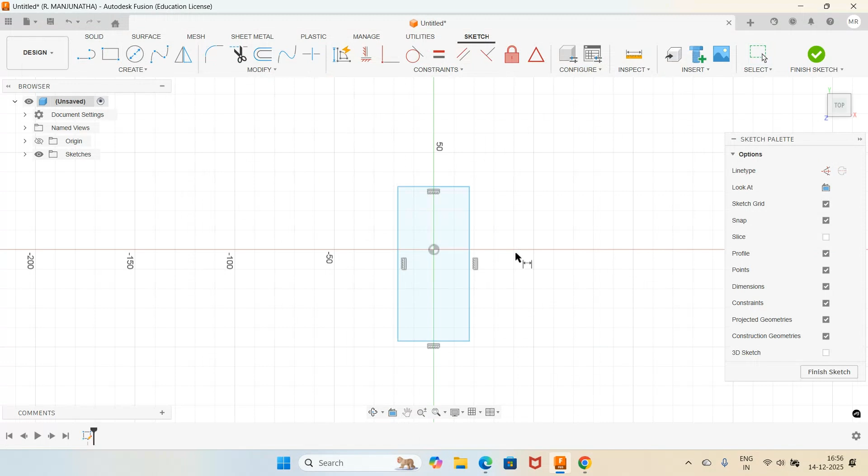To do that, I will go for dimension, select this, and make it 50. Then take this endpoint to this, make this as 25. And from here, you have 60 and 70. Then go to the end of this, make this as 60. And then give this as 130.

Once you do that, the entire model has been constrained, the entire sketch has turned into black. Then go to finish sketch, then go to 3-dimension. Here you can see the extrusion height is 18 mm.

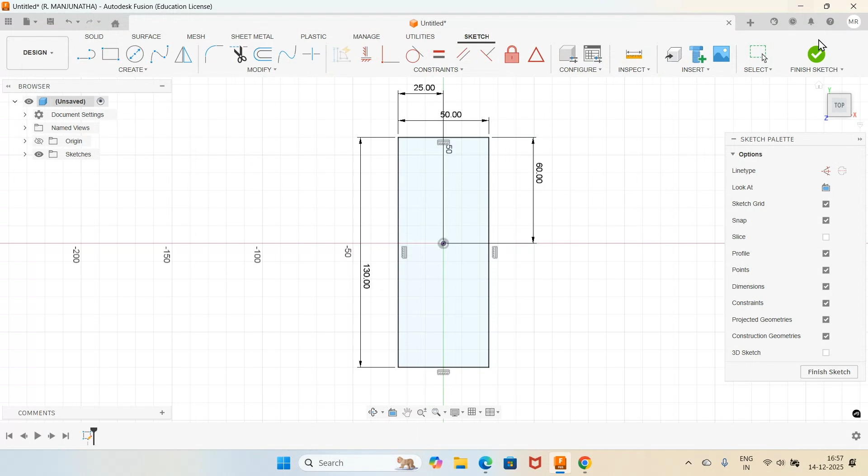So to do that, I will go for extrude, give the distance, now it is showing in the direction. If you go along the direction, it becomes positive. If you want it in the negative direction, you can give the opposite direction and a negative value. So if I take this to the bottom side, you can see it is negative. But since I want it in the positive direction, I will drag this and give the distance as 18 mm. Now once you do that, we have the first model.

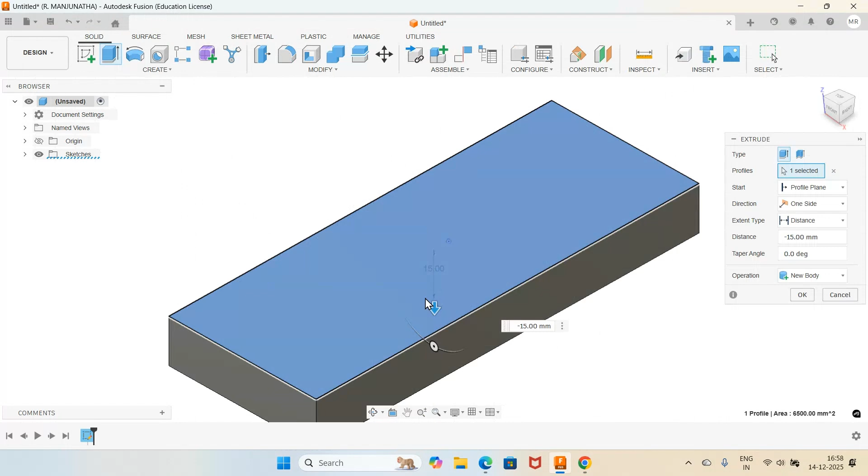That is the base of the model. Then we're going to create this. So what is the dimension? Here you can see I will take the top plane as the reference plane.

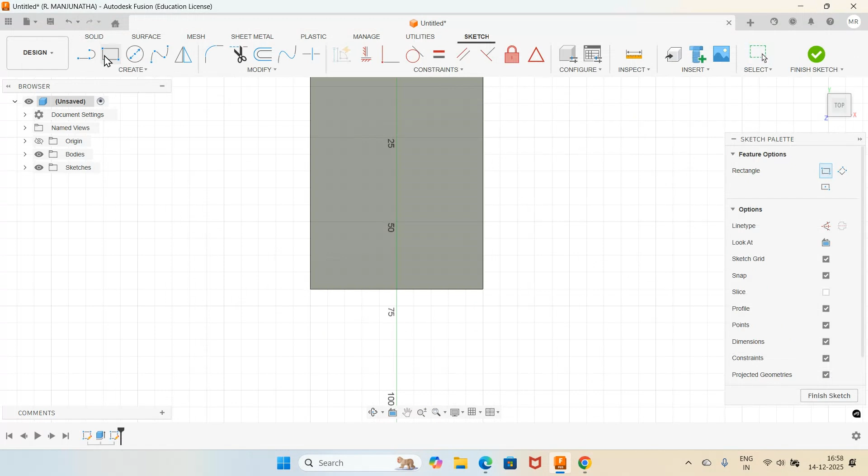Then I will go to sketch, click on this, then come down to this portion. Go to rectangle, select this point and drag this. Then go to dimension. The width is 18, so take this dimension as 18. Then automatically the other dimension has been fixed.

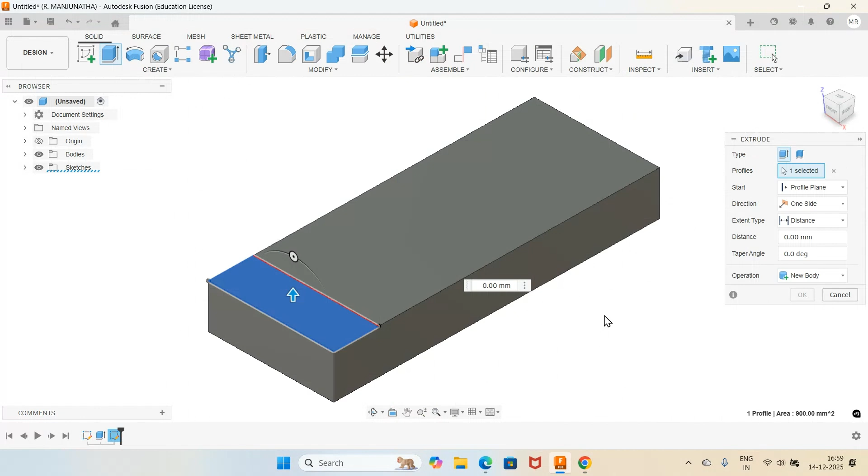The total distance is 40 plus 25, which is 65. Since we have already taken up to 18, 65 minus 18 is the distance. So I will go for finish sketch, go to extrude, select this profile and go to 3-dimension. Now here you give 65 minus 18, and since it is joined, you say OK.

Then automatically that becomes the integral part of the first body, the first one. Now you can see here you have only body 1. The next thing is I need to create this as a

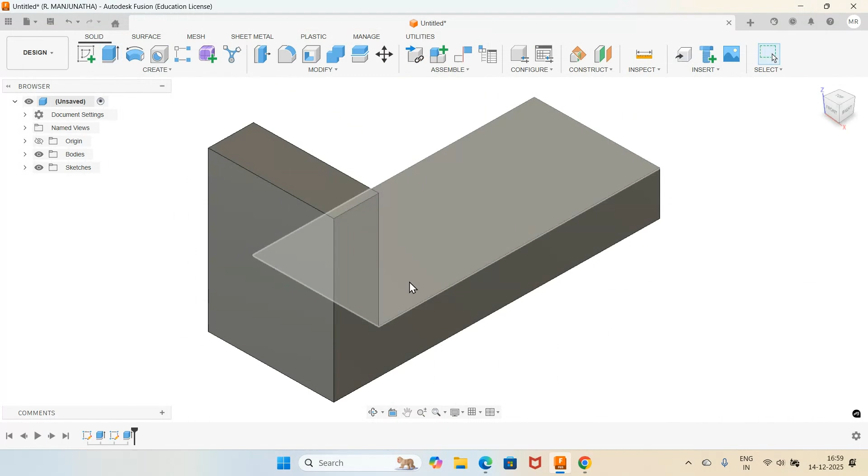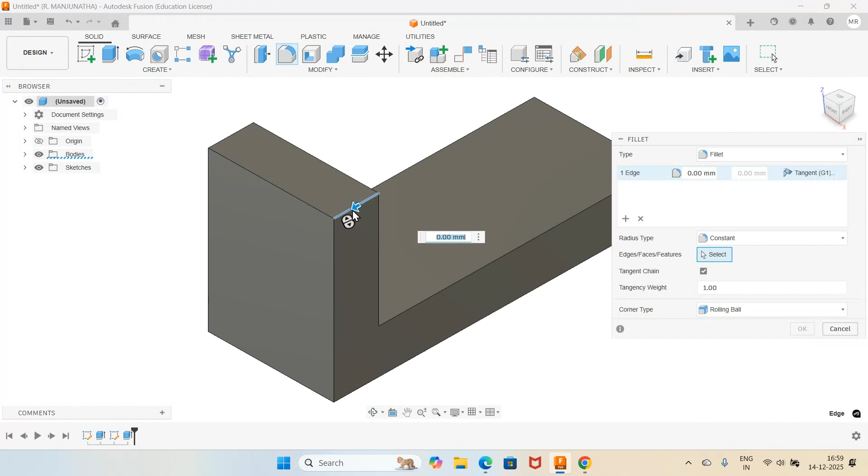radius, that is the fillet radius, which is of radius 25 mm. So to do that, I will go for round, click on this, the fillet dialog box will appear, select this edge and also this edge, and give the dimension as radius 25. So it will be created here.

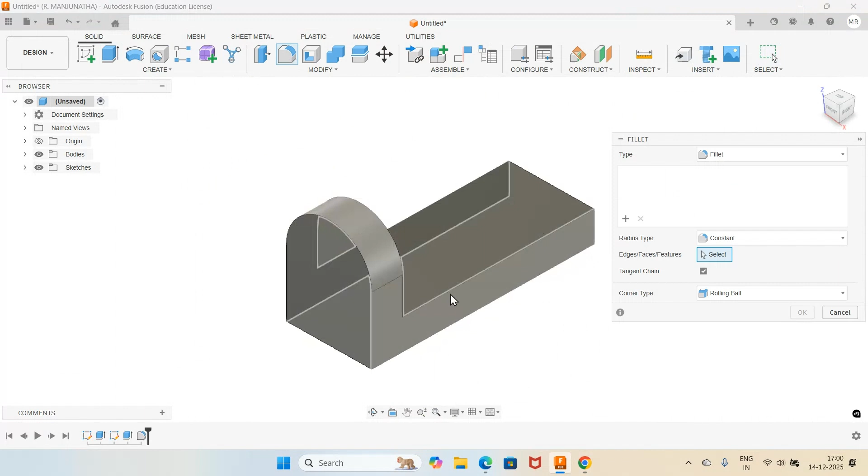Similarly, on the other side, you have the radius of 25 in this case also. So to do that, I will go to fillet, select this edge, and then on this side also select this edge and give the radius as 25.

So now we have the entire thing we have done. After that, what I need to do is create this one, which is 20 mm from this side and also 20 mm from the other side, because totally, sorry, 10 mm on this side and 10 mm on this side. Total distance is 70 mm.

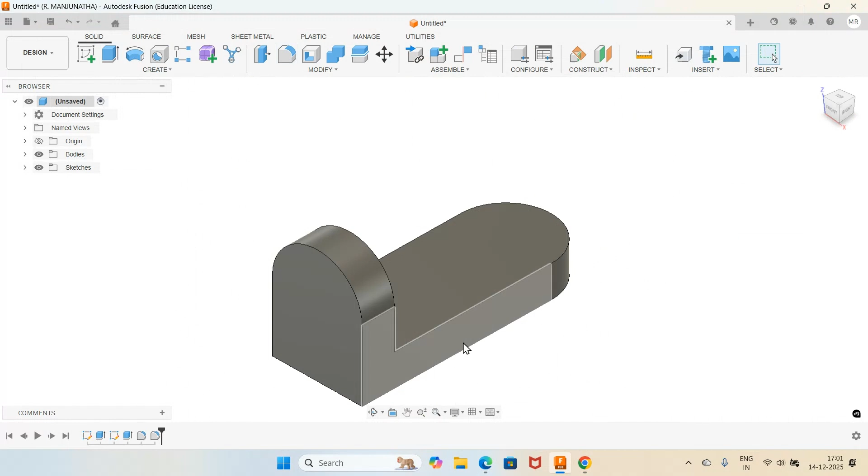So to do that, I have to go for the front plane, that is from here, so I need this plane. But the question is, here you have only 50 mm width if you look from the left side, and you need 10 mm away from this. Since you don't have any plane here, 10 mm in front of this particular direction, so now I need to create that.

So I will go for construct, go to offset plane, select this plane and give the distance as 10 mm.

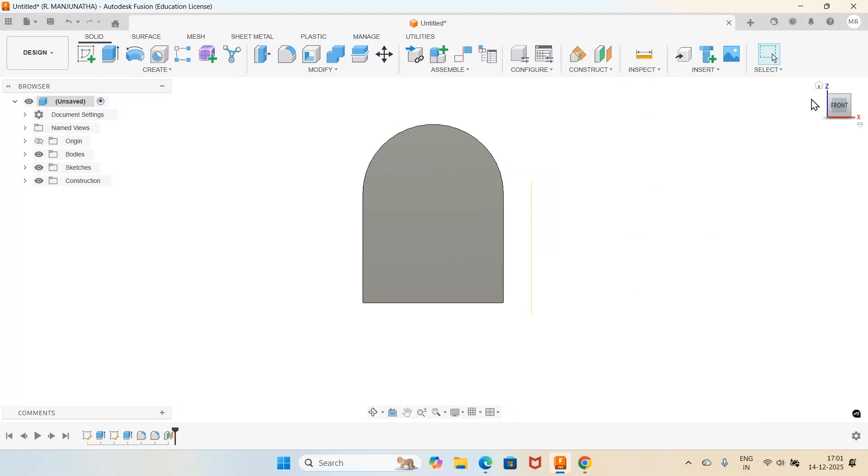So now if we go in the right side direction, you can see that one plane is created, which is at a distance of 10 mm from this base model. Once you do that, I need to go for a circle of diameter 36, and there is one more circle of diameter 22.

To do that, I will go for sketch and click on the newly constructed plane, which is at a distance of about 70. The center of this circle is 70 mm from this base, so I need to consider that.

First I will go for dimension and check between these two. What is the dimension you have now? I will select between this and this. You can see there is a distance of 70 mm.

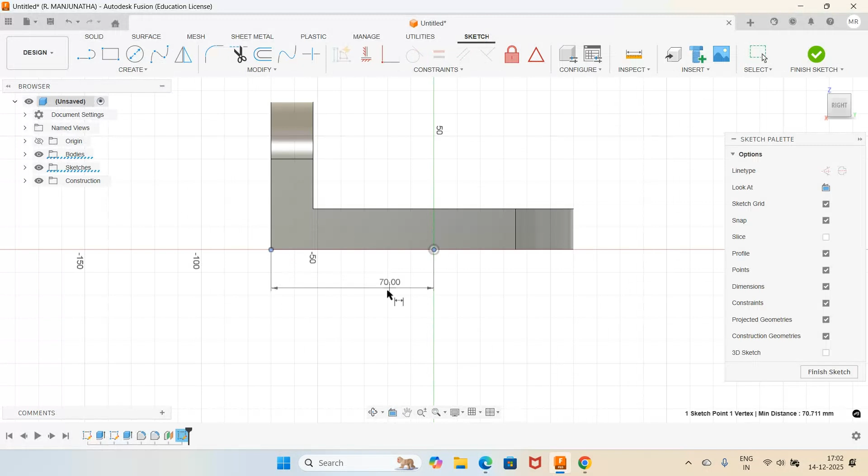Now I will create the circle. Go to circle, select some arbitrary point and draw a circle. And you have one more circle - click and create one more circle.

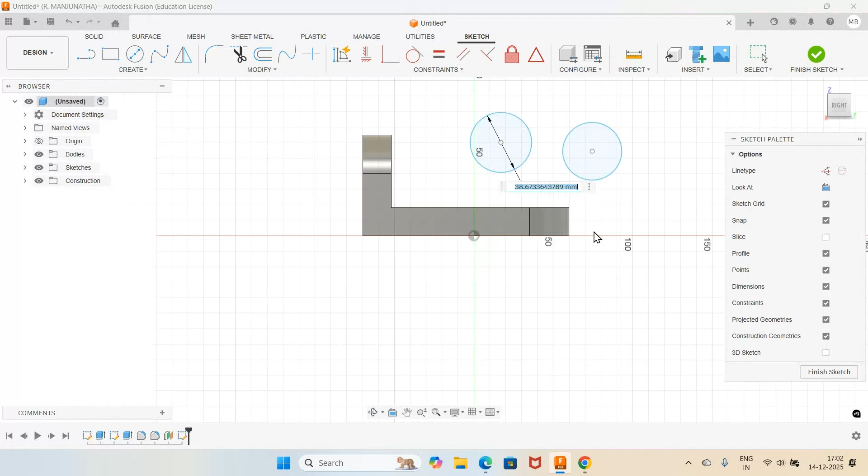What dimension do you want here? The dimension is 36, so I will go for dimension, select this, and make this dimension 36. Once done, the center of this circle should be along the center of this. So I go for vertical, select this and select this, so it becomes vertical in one direction.

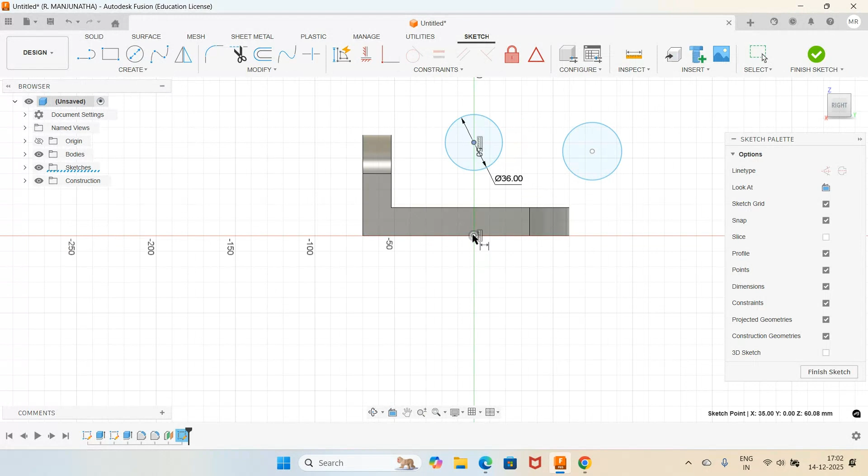The question is, what should be the height of that? The height is about 50 mm from the base, from this point, which is the model point. So I go for dimension, click on this and this, and give the dimension as 50. Now this has turned black.

Similarly, you can see this circle is also blue. Now I want the center of this circle to be the center of this one. Since this is 36, what is the other dimension of the circle? You have 22, so I need to go for dimension, select this, and make it 22.

Now the circle has been given the constraint of dimension 22. What I want now is this circle's center point to be the same as this one, with reference to this. So I go for concentric, select this circle and select this circle - see the color now.

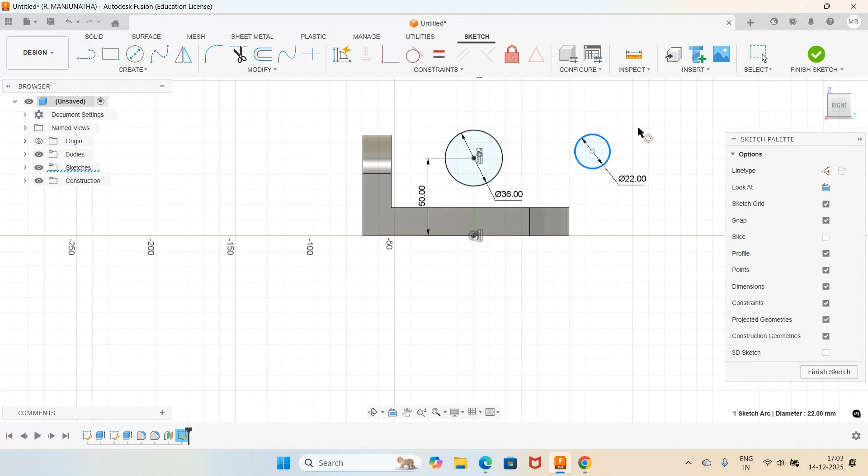Automatically it becomes black. Once you get this, go to finish sketch, then go to 3D and go to extrude, select this profile. Since I want the direction to be opposite, you click over here.

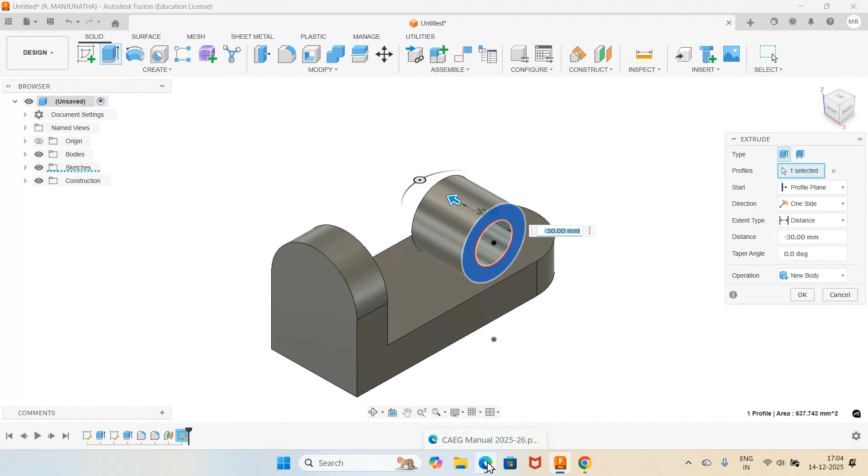Now what is the dimension you want? That depth is 30 mm, so you give minus 30. Now we have the sketch which has been completed.

The next question is, I need to create this portion now. So how to do that? For that, I will go for sketch, take the center plane, which is exactly at the center, then go for fit.

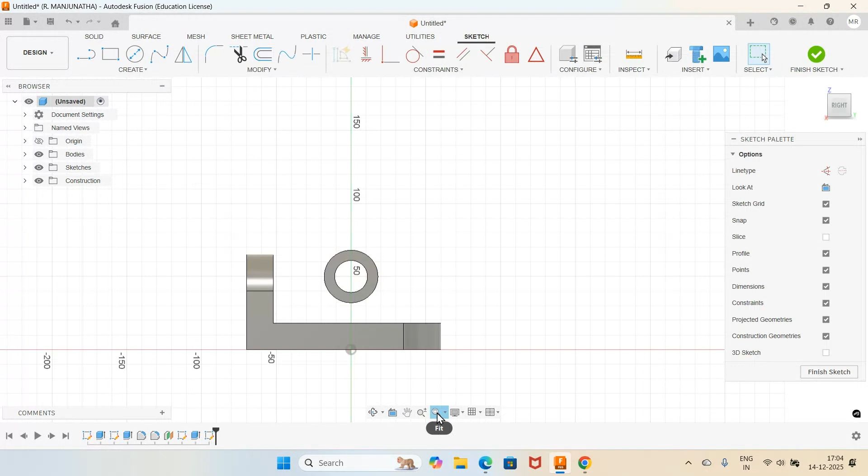Now I will go for create, then project, select this outer circle and say OK. Then I need this line to be joined with this particular portion. Similarly, that line is also to be joined tangentially to this outer circle.

To do that, I go for line, select some arbitrary point and place it. Then go for tangent, select this line tangentially to this. Now we have this pointer.

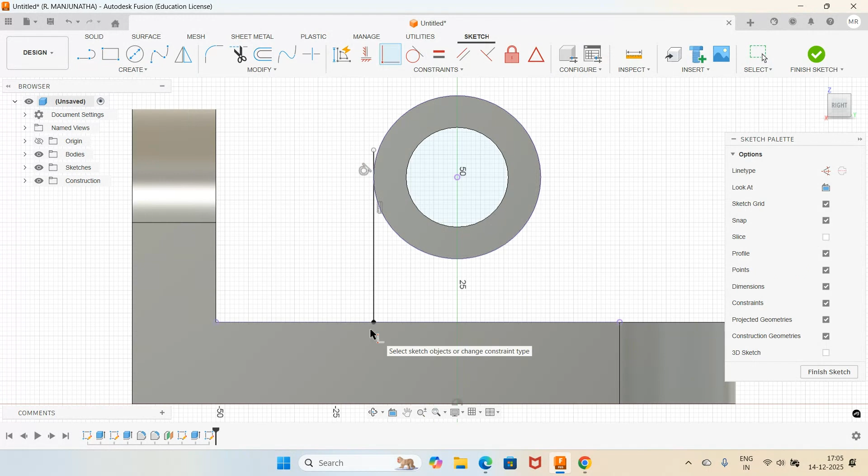Similarly, go to coincident, select this and select this line, so we have the point which is on this side. Similarly, on the other side also, I want the same thing done.

So you go to tangent, select this line tangential to this outer circle, and similarly I want the coincident of this point on this line. Once done, you remove the extra portion by going to trim, select this and remove the extra portion here.

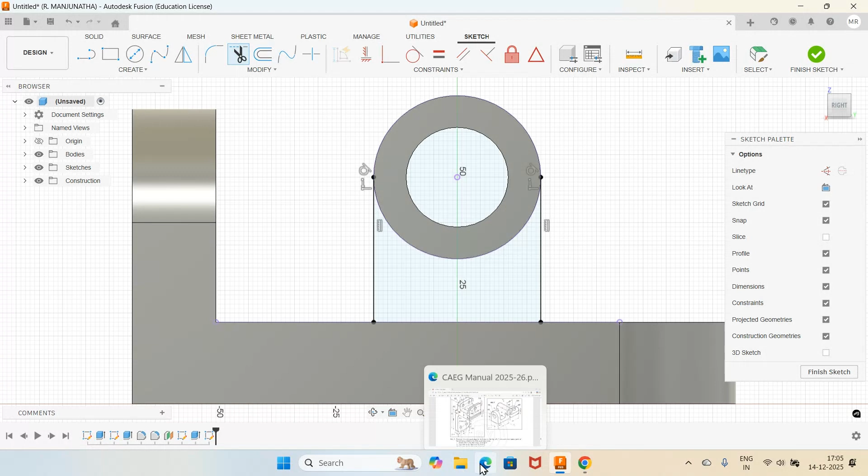So now we have the area. Once you have the area, I want to extrude this to a depth of 50 mm. So I will go for finish sketch and go to 3D. Now this is exactly at the midpoint.

So I want only 50 mm, so that's 25 mm on this side and 25 mm on this side. To do that, I will go for extrude, select this profile, and go to symmetric, select on symmetric.

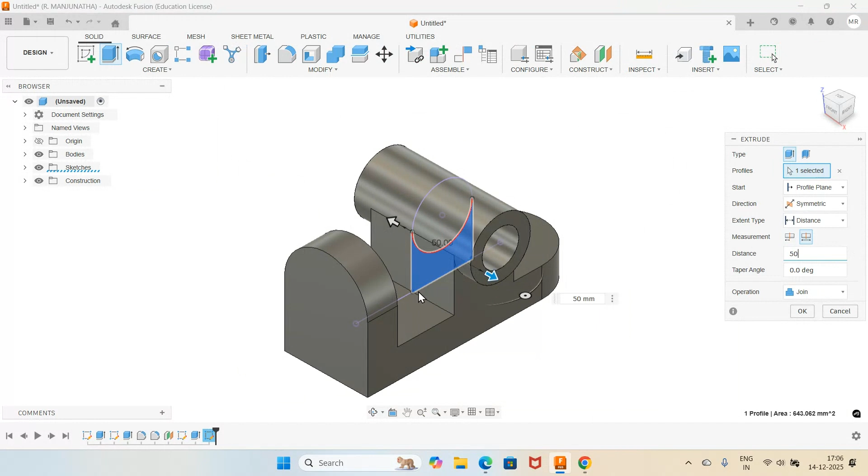So extent type the distance, then you take whole length and give the distance as 50 mm. Then you can see that has become an integrated part. Since I want to join to the same model, I will say operation is joined and say OK. Now the drawing has been completed, but we need to create the holes.

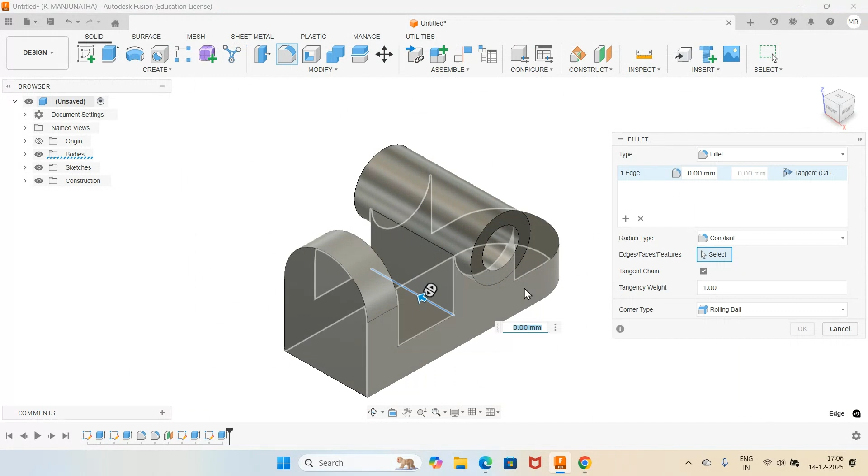Which are all the holes? First you have the fillet radius. This side is fillet radius of 5, here also fillet radius of 5, here also fillet radius of 5. To do that, first I will go for fillet, select this line, and then select on the other side. Select it on this side and also on this side and give the dimension as 5.

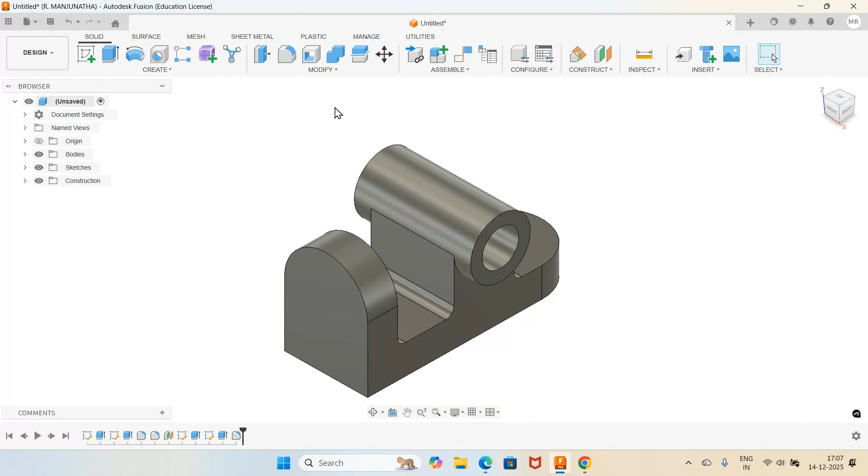So we have considered the fillet radius. The next thing is I need to create a hole there. So how to create the hole? You just go to the hole dimension, click on this surface. What is the diameter of that? The diameter of that hole is 22, which is concentric with this circle. Or you can take it from the base as 40 mm, that we are going to counter check.

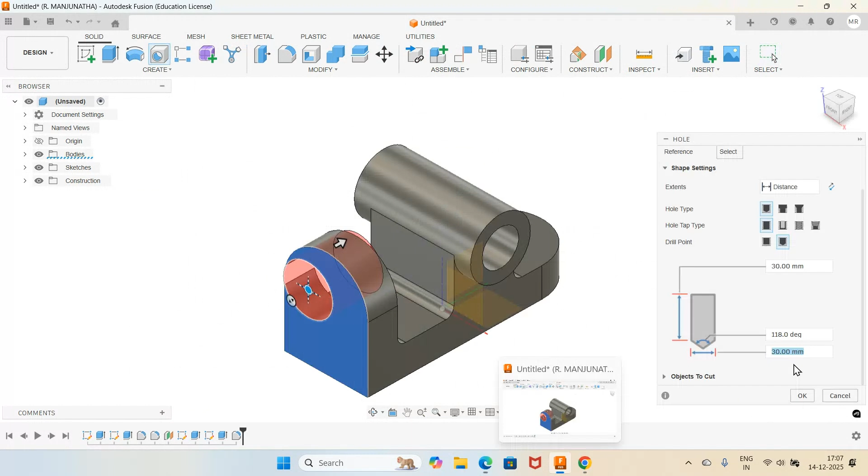So to do that, I will just go to the diameter. What is the diameter which you want? The diameter what I want is 22. You just take the diameter here as 22. Then you say the distance, not through all, up to.

You select this and go to this side, select it on this face. So we have the diameter till a depth of 18 mm. Why? Because that is the thickness what you have, this 18 mm.

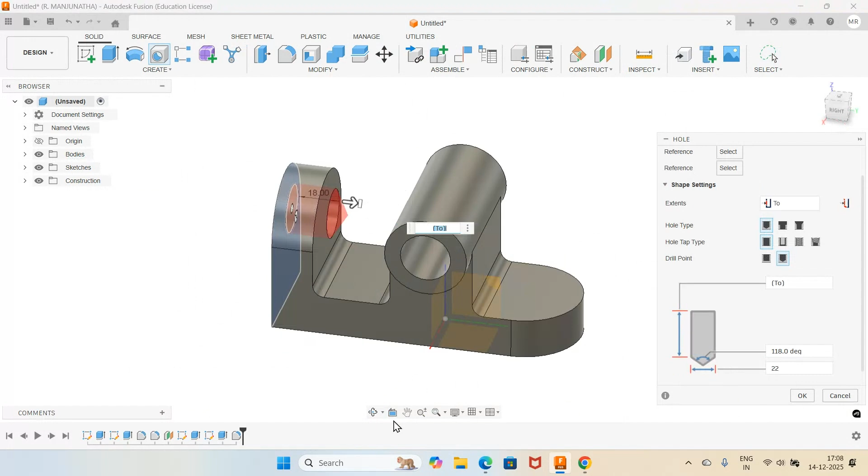Then you just rotate this, then bring it to the center. You just take it onto that point where you have the center point. You just drag it, you can see there are two holes which are coming inside. Bring it to this portion of the hole.

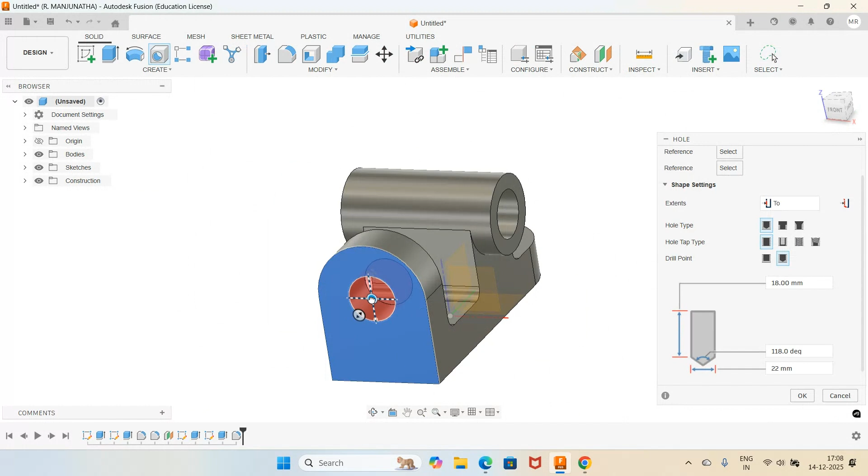You just, by holding the first button of the mouse, drag that and place it onto that center point, then release the first button of the mouse. I will just go to hole, click on this particular face. Automatically that will be considered now because previously I have set that hole as this, and now since the angle is 118 degree, you don't want that, I want flat, so you just click on this flat.

Then the distance, you can say through all, because there is no other face. But here I have taken up to point, because if I say through all, then what happens? It will remove the material from this particular portion also because it is thrown through. Wherever you have till here, it will create the hole. But since you don't have anything after this, you can go for the through all option.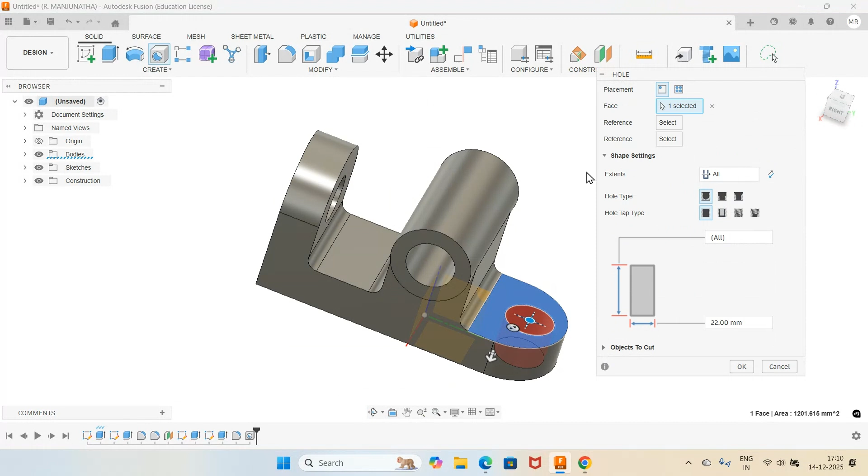Or you can go to up to 2 point, then you can select the bottom face, or you can give the distance as -18, whichever you feel is right. Now then you just drag it out. Now we have the two centers here. I just take it to the first one and place it over there and say click on OK. Now this is how you will be able to create the model.

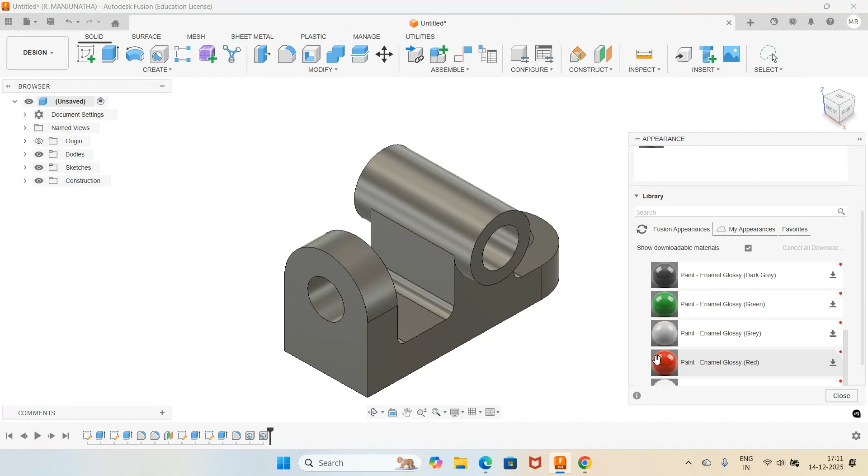Once you create the model, then what I need to do is go for change the coloring appearance. Now you come down to paint, then you come down to glossy, then take red, then drag it and close it. Now this is how you will be creating the model.

Then I want to take it to the drawing. How to do that? First I need to save this, so I will just go for a save and then it goes to the proper location.

It comes to the proper location where exactly you want. You select that particular portion and I will simply say one model, first model, whatever you want, or else you can give this one, ISO underscore 7. So here I will type ISO underscore 7 and the location it will be considered.

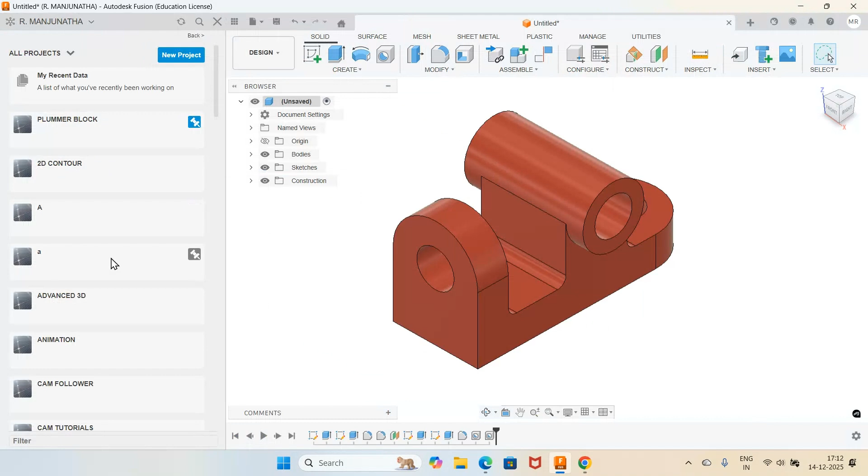If you want to change the location, you can go to the panel, show data panel, and then go to the project, and from there you can create the project here. I want to go for the same one I created in the earlier stages. I will double click on this particular folder. So from the home, we come to this folder.

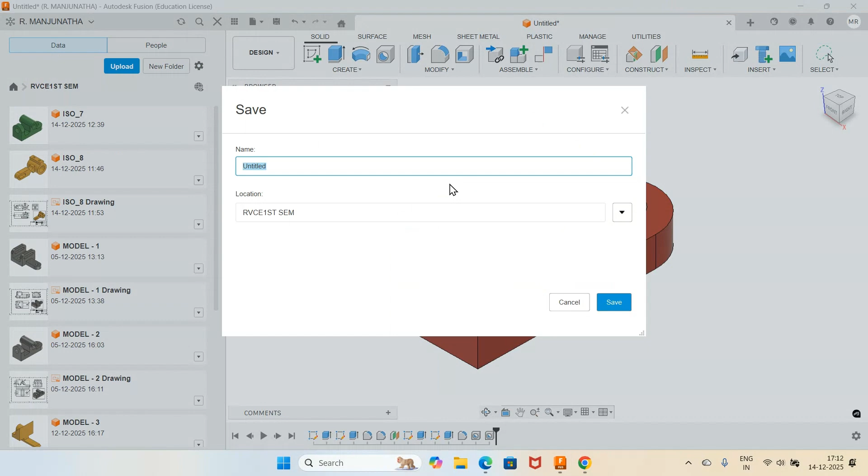Now I want to save this. You just go to save, and I will say ISO underscore 7.

Once you get this, now I need to go for the drawing. So here I will go for the scale. Just click on this, take 1:1.

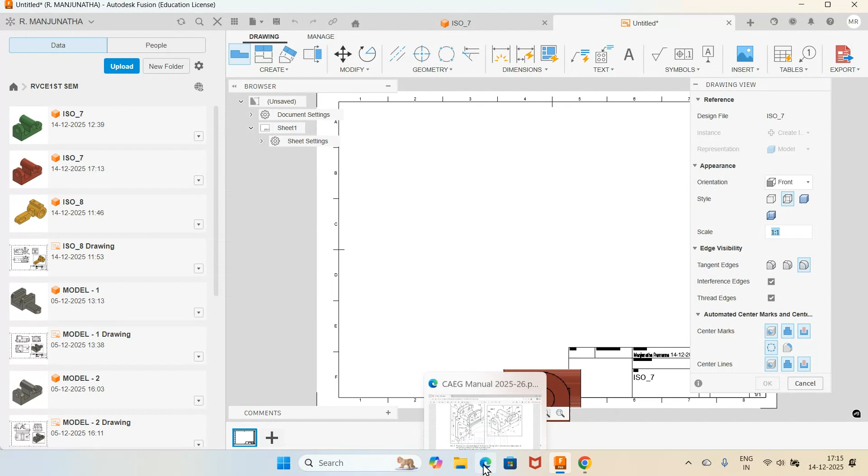Since I want the front view, how should the front view look? The front view should look like here. That means I want the front view to become like this.

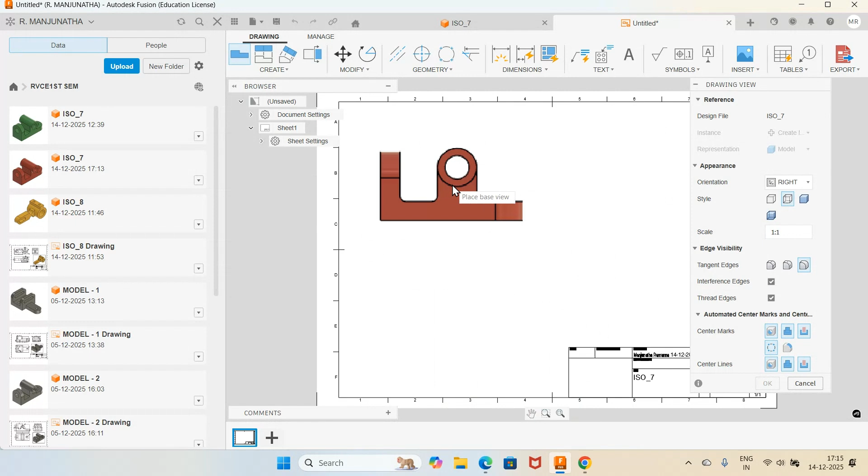To do that, I will take the right view and click on this. Now you can see that portion has come here. Just click over this and say OK. Once you do that, you have the front view.

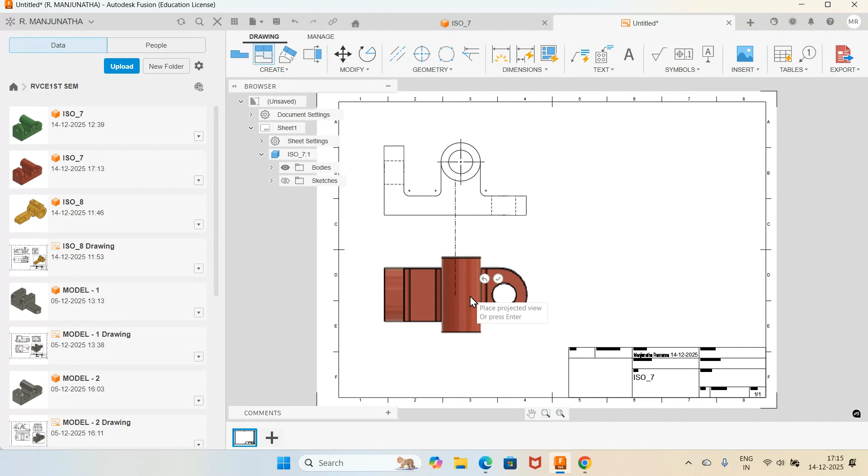Then you go to the projected view, click on this and take it to the top, and just click over this. Similarly, take it to the right or left view, click on this, take this to the isometric and say enter. Then double click on this, go to the shaded portion, and say close.

Now I need to create the drawing dimensions. First I want the entire portion of 130 and 70. So go to dimension, go to linear dimension, take end of this to end of this, take 130. Similarly, take end of this to end of this, take 70.

Then I want the center position. Select on this, you have the center line. Similarly, you have the center line between these two.

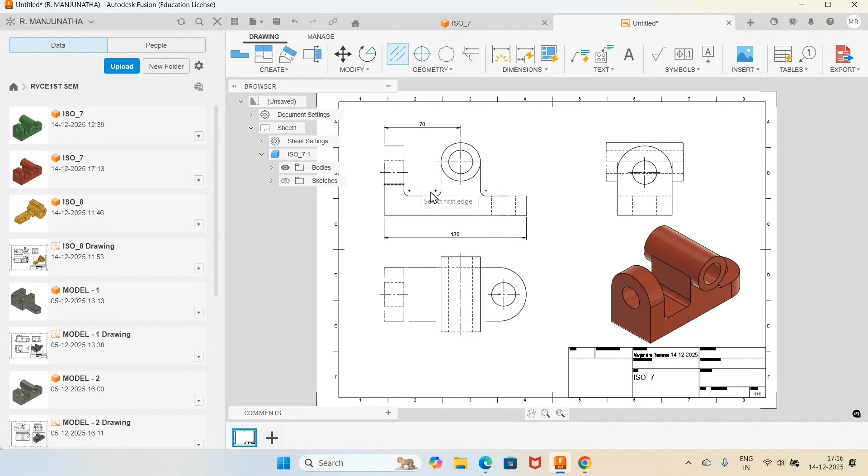The next thing is I want this height. What is the height of this? The height is 40. So come down to dimension, linear dimension, take end of this to end of this, give 40. Then I want the diameter and radius dimensions.

Go to radius dimension. Just click on this, take the radius as 25.

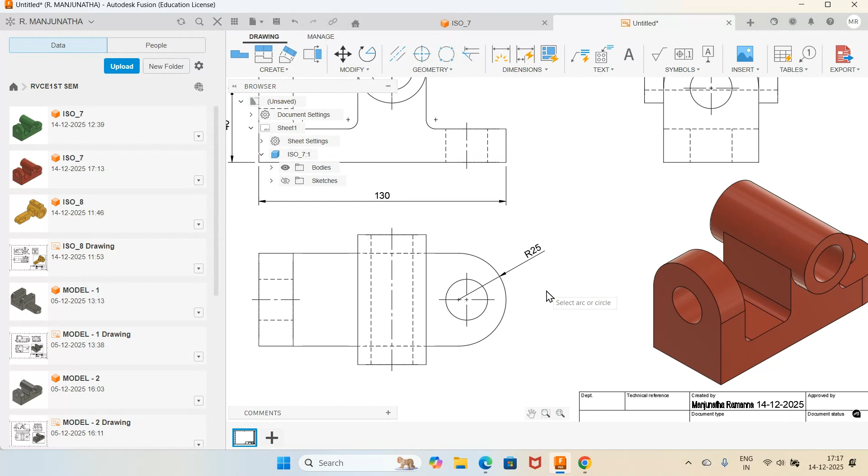Then I want this portion, which is again diameter 22. Take this dimension, go to diameter, select this and give the diameter as 22.

Here this height is given. So again this diameter we are getting, so then here we have this diameter. Take this diameter as 22 and this diameter as 36.

Once you do that, then the height of this is 50. So you take linear dimension. Select the endpoint of this to endpoint of this, take this dimension as 50. And then again you take this dimension between these two as 18.

Then I want this width, which is 50. Then you take between these two, which is 18. Then which are all the other dimensions I want?

So here I want 10, 10 on this side. Select between these two, it will be 10. And the other dimension automatically you will get 10 on this side also. Totally it will become 70.

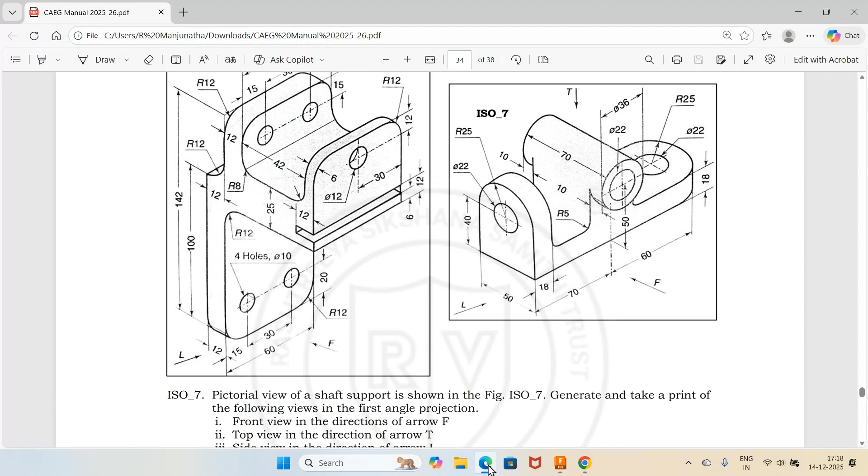Then do we have any other dimension to be shown? Yes, radius 5 on this side and all other dimensions which I have shown. Then I want this fillet radius. Go to dimension, go to radius, select on this and give the dimension as radius 5. Similarly on this side and similarly on this side. So we have all the dimensions which we have covered.

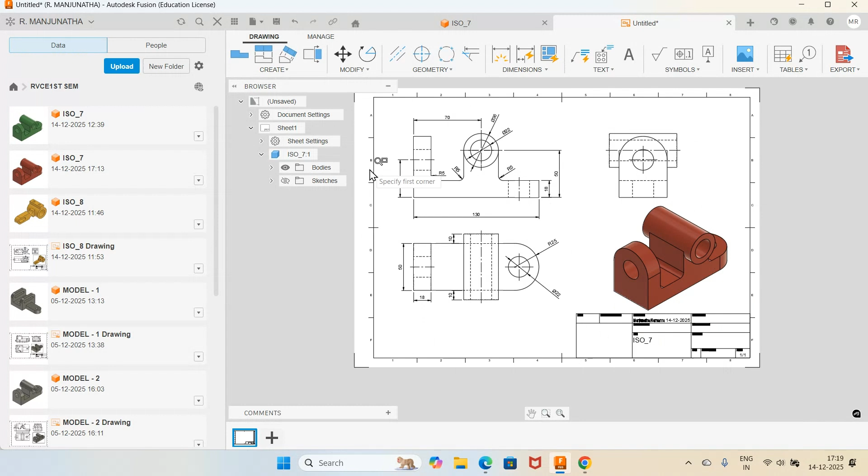This is how you will be able to create the model using zoom window, by using the Fusion software. So this is the conversion of three-dimensional drawing into two-dimensional drawing, giving all the dimensions which are required.

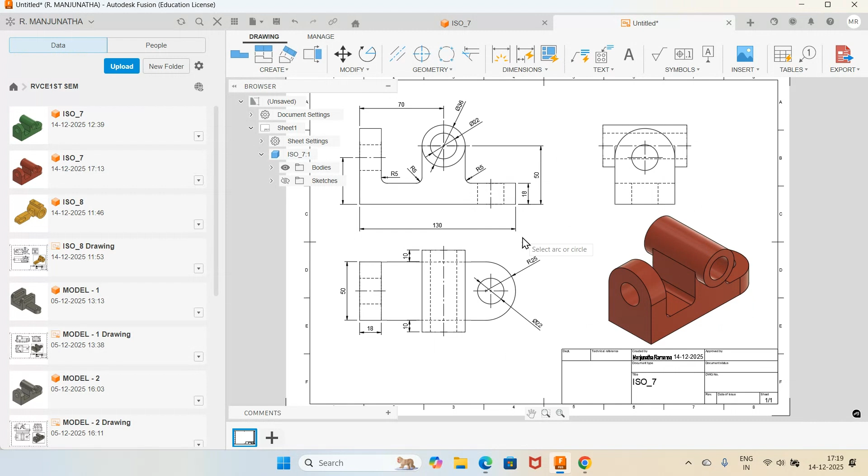You can also go for auto dimension, but the problem is you will not be able to get the desired result. Since we want the desired one, like whatever has been shown in the model, the same thing I want in this. So it is better to go for actual dimensioning by doing it manually.